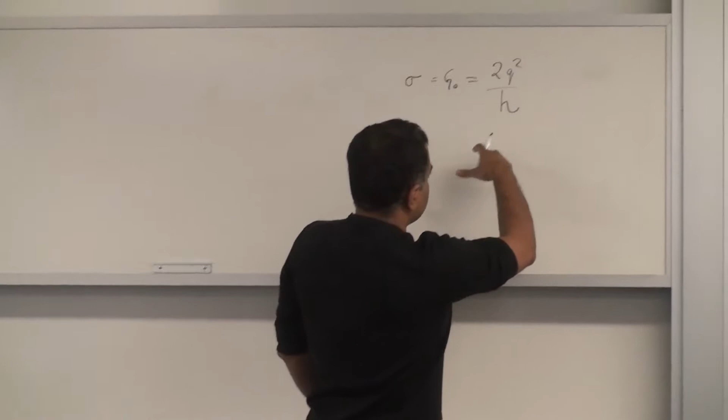That's something we saw falls out very simply from looking at electron transport through a set of wave modes through allowed states, right? So that's something that came out, and when we allow scattering, the conductance is always lower than this. So this is kind of the max we can get through a single one-dimensional mode.

And now we are going to higher dimensions, and at the same time what I'm trying to introduce is the idea that whatever we have done till now is clearly applicable in vacuum, for example, or things like that. But once you put it in a solid, then clearly things are changing, right?

For that, we discussed that when we put particles in a solid, we have this periodic potential—this is kind of every solid state physics course, this is what you cover—that if you have a periodic potential, the electron cannot have... this is the potential energy profile that the electron is seeing. It's a generic potential, this is a cosine potential, but in general you have much more complicated ones where near the nuclei it might go to very large, lower energies.

Regardless, in a free electron state, the band structure allowed electron states follow this parabolic dispersion, momentum squared by twice the free electron mass—that's the kinetic energy in a free electron case. And whenever we have a periodicity of A, a periodic potential with a real space periodicity of A, then we have characteristic k values given by pi over A and minus pi over A. At those k values, the wavelength of the electron matches up with the wavelength of the periodic potential, and you get standing wave formation, right?

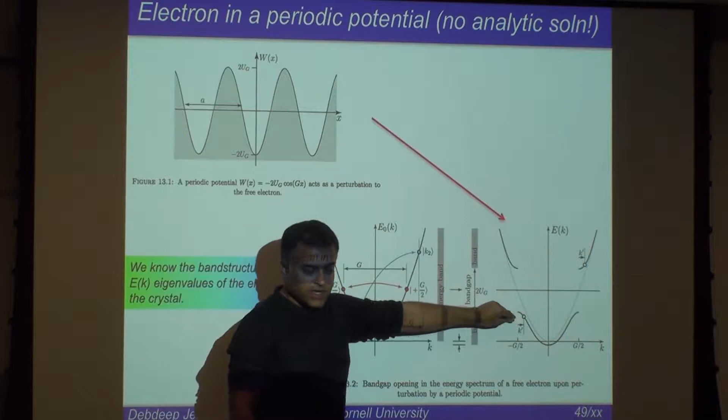So the gap is related to the strength of the potential, and if you have a perfectly periodic cosine function like that, then it is just the amplitude of the crest to trough, UG. It's exactly that, and actually that's 4 times, but it's related—I mean, it's linearly proportional to that.

So this we get from physics, and then now we fill in electrons. These are all the allowed states, and we put electrons into the system. And if I have only one electron, then it can occupy some state here.

But then I fill in every atom that's sitting here. Every atom comes with a certain number of electrons. For typical semiconductors like silicon, each atom comes with many electrons. Many of them form core levels that are deep inside, that don't even form chemical bonds to the next atom.

The ones that form the chemical bonds are the outermost shells of the atoms, right? And those outermost shells, so in silicon, for example, there are 4: 1 s and 3 p orbitals that will chemically bond to the next atom. Those electrons are shared, and for those electrons, we are looking at...

Only when the electrons are shared between atoms can they actually have a momentum. So only those electrons have a band structure. Does that make sense? All the other electrons are localized. They are bound states for the atom. They are not moving, so they don't have momentum. We're not drawing their band structure at all.

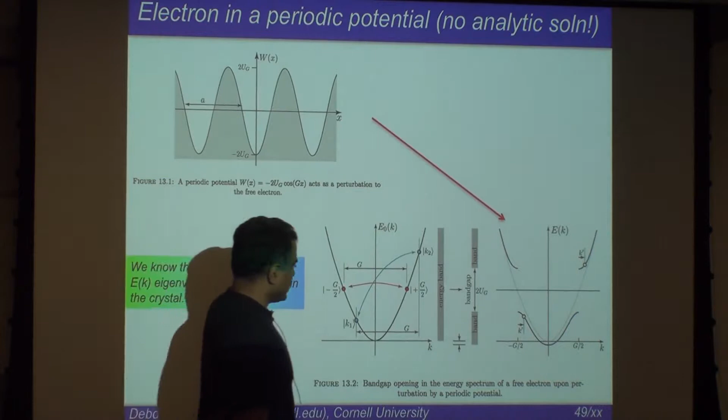Now we are looking at transport, and instead of a free electron band like that, we generally try to plot everything in the first Brillouin zone, because of it being a wave, k plus 2 pi equals k. If you translate something by 2 pi along the x-axis, or you translate something by the reciprocal lattice vector, which is g, along the x-axis, these things are actually the same.

Because the potential is periodic, and you're solving for electron states, basically what you're solving is the Schrodinger equation all over again for the periodic potential, that's V of x, such that V of x plus a is equal to V of x. That's really what you're solving. You're finding what are the allowed energies if I have a periodic potential.

Then essentially what this solution is telling you is the allowed energies are given by that picture, the band structure. Those are the allowed eigenvalues, and it's different for different k's. You have allowed different energies for different k's.

And just like individual atoms, actually there's a very close analogy to individual atoms in the periodic table. If you're looking at electrons in a periodic table, you have hydrogen that has one electron, and that is extremely reactive. It will try to bond to anything that wants to give away or take an electron. It can form hydrogen chloride, hydrogen fluoride, all that stuff. It will chemically bond.

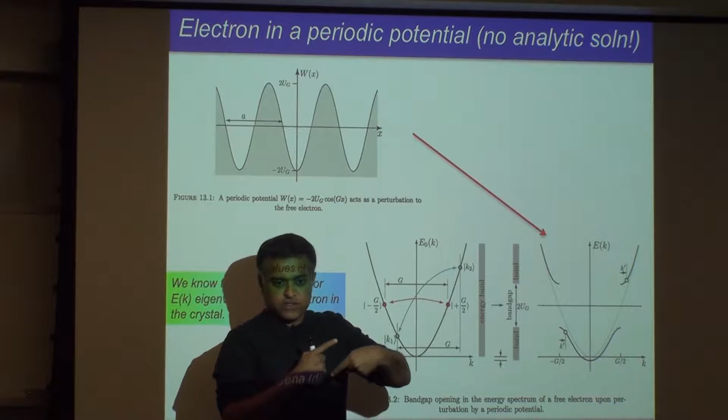When you go to the next atom, helium, now that s orbital is full, it has one up and one down electron, so it's extremely inert. It doesn't want to react with anything. You go to the next, sodium, it has one extra electron, now it again is very reactive. So there's this periodic nature of going between insulating, very reactive, insulating. That's also the name periodic table.

In a very similar way, once you have a crystal, it's the same thing, except we're now talking about conductivity. If I increase the number of electrons, as you can see, I have multiple bands. If I increase the number of electrons and let's say I fill up a band, it's insulating now. You put a little more, now you have a metal. An insulator and metal and all that happens obviously from this picture. If you move from the left side of the periodic table, you have metals. Move towards the middle, you have semiconductors. And then you have gas form.

It's not even a solid. You know, gas is separate.

But then you have this sort of periodicity also in the periodic table because of this, right? Yeah, saying with that point, you were saying like valence. You have a valence band layered by conduction band layered by valence band.

So what I'm saying is when you solve this, let's say for silicon or whatever. What we have now is for atoms we had individual energies, right? And now I form a crystal, right? And we have already seen from a very simple tight binding picture that if the electrons can bond to other electrons, let's say this electron can bond to the next one, then it will form a band. We have seen that, right?

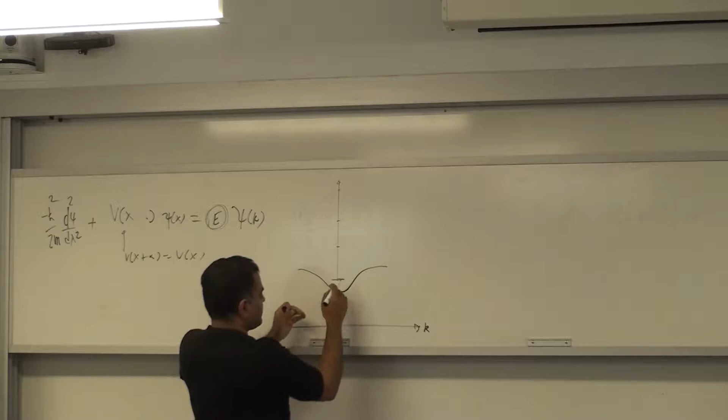And let's say it forms a band something like this, and if it can bond, then it will have some momentum k. If it cannot bond, there's a bound state, there's no k for that. So this energy state, maybe it came from a pz orbital or whatever, it became a band. This one also became a band. That became a band, right?

So now you have multiple bands of states that were initially atomic states, and then they spread out, and because of being in a crystal, it becomes a band. So what I'm trying to say now is based on how many electrons are there per atom that participate in this bonding, you can go from metal to semiconductor to metal to insulator to metal to insulator.

And you go through the periodic table again. Just so you start with sodium, magnesium, and all that, and you reach carbon, and then you come back to the next. So you're filling up electrons as you go, you start with sodium. Maybe you have something like this, the Fermi level is here, right? One electron per atom, right?

You increase, you go to magnesium, it's a little bit higher. You go higher and higher, and then finally you reach, in the first row of the periodic table, carbon, which is diamond, right? And then now you have maybe filled up the whole thing now. So you reach a semiconductor now, and you have a gap. That's all I'm saying.

So this shows up because it's in a crystal, in a condensed matter state or solid state. It shows up as a transport problem now instead of chemical reactivity. Does that make sense? I'm trying to draw an analogy between chemical reactivity and electrical transport. And actually there is a strong analogy because they are both related to electrons, right? And they are both related to how many electrons are available for doing that business, that physical phenomena.

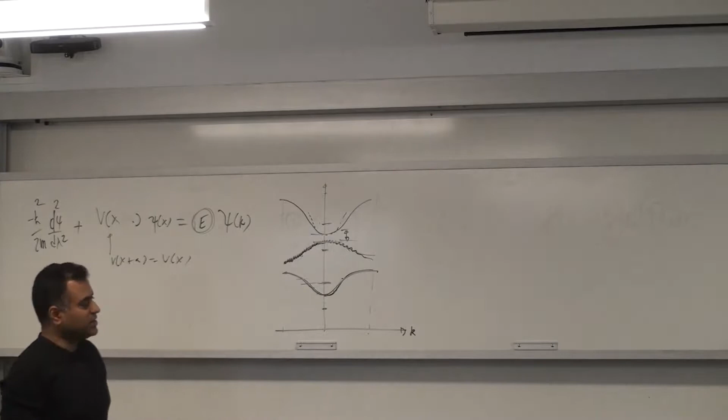All right, so now the basic picture we are saying is we are going to fill it up, and our semiconductor model would be: I filled up this band, and that band is empty, and I have a certain gap, and now all my transport will occur either in the conduction band here or in this valence band here, very close to the band gap of the material. So that's a semiconductor. If we're talking about metals, then the Fermi level is inside here.

Okay, and now if I zoom into this point here, E of k, if I'm going to look primarily at the conduction band, and we're going to focus on that a bit today, we look at the conduction band, and I zoom in here, then I draw the band structure E versus k all over again, and you can see now that the minimum is what I'm labeling as E sub c. This is the conduction band edge, the minimum of the conduction band, minimum energy, and all the other states allowed above it.

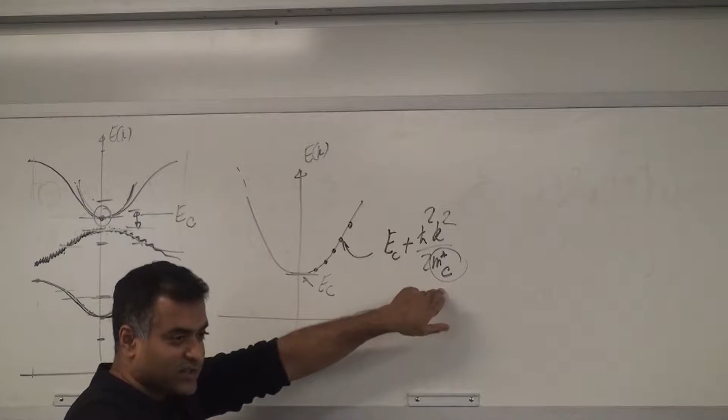Near any minimum is a parabola, and this parabola's formula is E_c plus h-square k-square by twice the effective mass of the conduction band, the curvature. This is just a number, right? And it's clearly not equal to the free electron mass, because it has come from the fact that there is a periodic potential like this, right?

It is related to how strong the potential is, etc. It's really not related to the free electron mass. What you can prove is that for the conduction band, if your band curves upward, the effective mass is going to be smaller than the free electron mass. You can prove that—it's going to be lighter.

It's not that the electron has actually become lighter, but because it's in a solid, if you want a classical analogy, it's kind of periodically accelerating and decelerating, but when you integrate, it's actually moving faster. That's one analogy, and it's actually a pretty apt one.

If I had a ball rolling along this direction and another rolling along this direction, the question is which one reaches here first in classical physics. You can show this one reaches there first because it will accelerate and decelerate due to gravitational forces. So there's some analogy, but I don't want to push it too far. I'm just saying it's lighter because it goes through periodic cycles of acceleration and deceleration—acceleration means velocity went up, deceleration means it came back to its original state. So on average the velocity was larger, if you want to think of it that way.

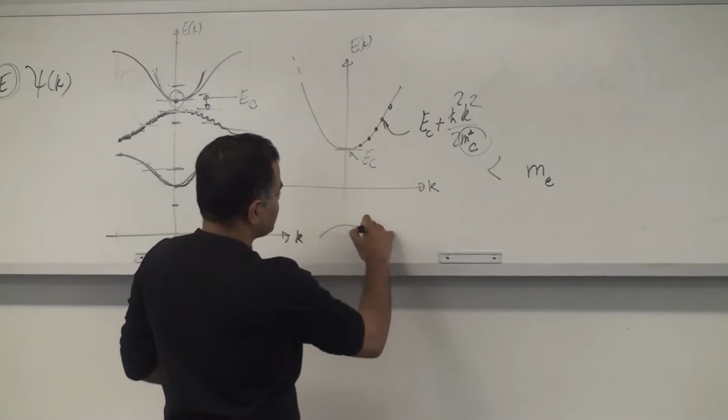By the same token, holes behave differently: for a valence band that curves down, the hole mass can sometimes be larger than the free electron mass, sometimes smaller—it depends. For the conduction band, you can prove it definitively. But regardless, at this point I'm just saying it's different, and this is also written up in the notes I've given you on electrons, band gaps, and effective masses. Please read that up.

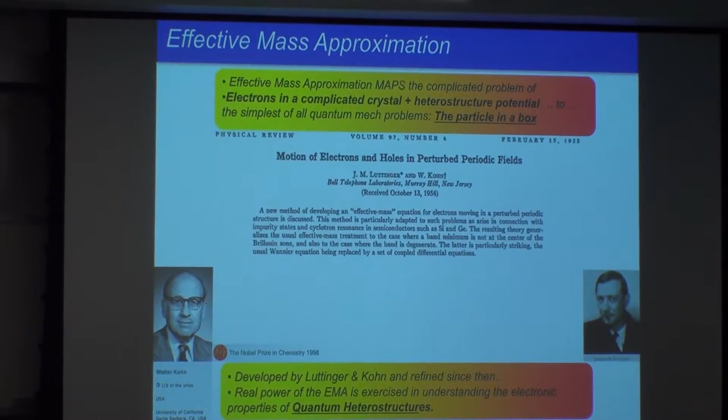I'm going to use this now to look at the idea of quantum transport through solids, giving a more formal introduction. The fact that effective mass appears can also be derived completely from the Schrödinger equation itself. This was done by Luttinger and Walter Kohn, a Nobel Prize winner, who also contributed to the development of DFT.

Here's the basic idea of that paper—it's a bit dense, but here's the core of it. If I put electrons in a periodic potential like we just discussed, then each of these states is an eigenstate, and Felix Bloch had already given us a formula for that state. Mathematically it looks like e to the power ikx times a periodic function in x, u_k(x).

Physically it's easy to see why this should be the case. If my potential is periodic, and if this is periodic, then you can see that if I take mod psi squared, which is the probability of finding the electron at x, that has to be periodic too. Intuitively there's no other option—if the potential is periodic, the electron distribution has to be periodic by symmetry itself.

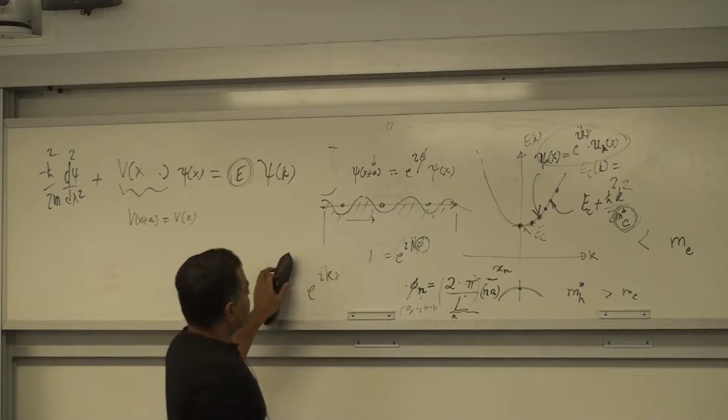So now, given that you have a Bloch function state, this is what I'm also saying, you can prove from here in one or two steps that it should be like this, or if you're given this, you can prove that it must be like this, and vice versa. So it can be related to the physical constraint that the mod psi squared is periodic also.

So now what Kohn and Luttinger did is they said, look, I don't want to solve the Schrodinger equation for basically in semiconductors. By that time, people have realized you can measure mobilities and effective masses and all that.

So they tried to reformulate the theory and make it closer to something which is much more usable from a perspective of heterostructures and doping and all that sort of thing.

And what they said is, instead of looking at individual k states, let's construct states, because an individual k state is spread out over the entire crystal. It cannot be located at a small point, near a dopant or inside a quantum well. It's spread out over the whole crystal. It's because its k, delta k is 0.

K is precise, right? So, but then if I collect a certain window of k's here and construct a superposition state of these such that I weight this heavily and weight that a little bit less, so I construct a state now which is composed of maybe 4 or 5 different k's, and then I write it as some phi of x.

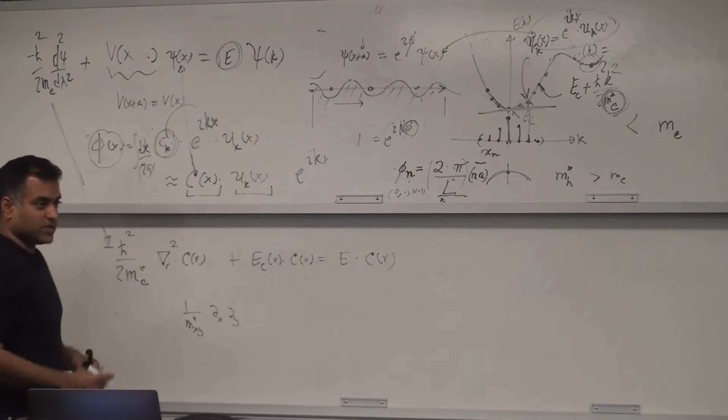It's a tensor. Yeah, exactly. It's a tensor, so it has some strength, and it also has cross terms. In some more unusual materials, you may get 1 over m star xy, with del x and del y, for example. You get all these things too - so in general it's a tensor, yeah, okay.

We're going to keep this simple, but behind this you may have situations where you get non-isotropic cases as well.

So this is your new equation, the effective mass equation that Kohn and Luttinger derived, which they used to explain quite a few things. Let's look at flat band situations where the conduction band minimum isn't changing—it's a bulk material, across the structure. You can take E to the right side and get E minus EC of R, or E minus EC. That's your new Schrodinger equation, the effective mass equation for electrons now, and in structure it looks exactly like.

Your Schrodinger equation you started with, but the only thing missing is the potential, and that's gone into the mass. Does that make sense? It's definitely much simpler, makes life much easier to handle, and that's why it's very popular—we're going to use it now. I think I wrote it here.

Now here's why it's so useful. In addition to being simple, let's say you build a heterostructure like some of the problems you're solving today in your assignment. The heterostructure obviously has a lot of atoms with a periodic lattice—maybe atom A, then atom B, going periodically, and then back to A or something like that. That's a heterostructure where the conduction band minimum

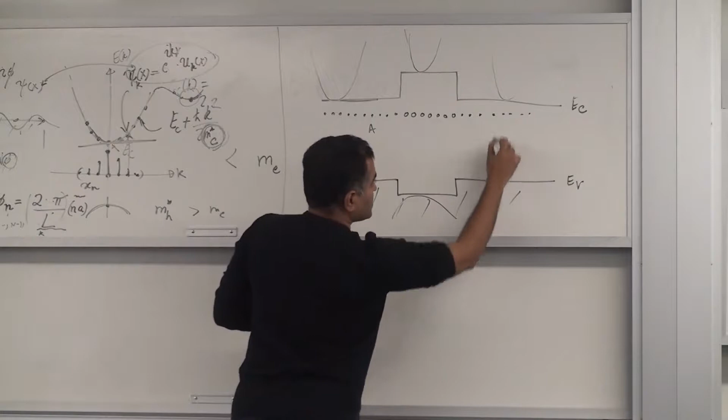So at all points in real space—this is real space, X or Y. Now, if you go to the effective mass equation, the total wave function is clearly changing in every unit cell. It can have—it's changing in every unit cell. Whereas the effective mass equation is looking only at the envelope part of it. The envelope part is changing slowly, changing slowly.

And we know that in this problem—this is actually the problem you're solving too in the assignment—you have an electron incident, coming in, carrying along with its wave function both the envelope part and the Bloch periodic part. Now, the envelope part, if you solve that, it's essentially the problem as if there are no atoms in the crystal. It's going in vacuum, but it has a different mass. That makes it much easier to solve this problem—you don't have to worry about the microscopic details at all.

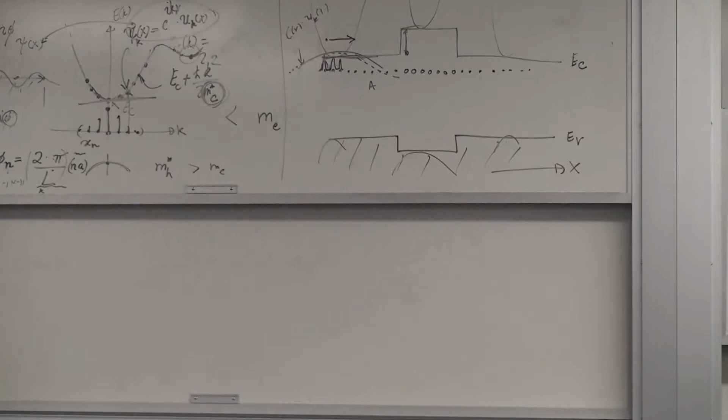And then if you have a potential barrier like this, which is the conduction band minimum changed, that change will appear here now—it's the additional potential term. Does that make sense? Any change in the conduction band—the conduction band minimum went from here to there—will appear as a delta EC here. So this is now your new potential.

You have mapped this rather complicated problem of many atoms, a condensed matter crystal, to one of the simplest problems in free particle quantum mechanics. You have mapped that whole problem to this problem now—it has a different mass. Yeah, that's a good point. So the only difference is this mass and that mass may be different—effective masses may be different.

So there will be a small tweak to some of the things you might want to do. For example, the continuity equation you use when you use the full wave function, d psi by dx, coming from the left must be equal to coming from the right.

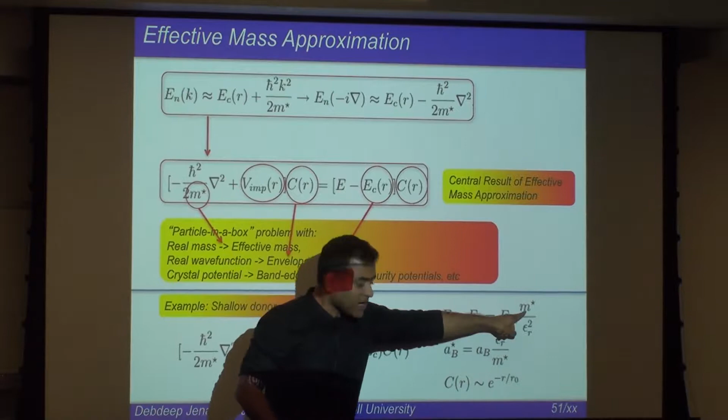And the hydrogen atom is the most solved problem in quantum, where you can find all its energy eigenvalues. So you can find out, if you put a dopant in a semiconductor, what are the allowed energies for that dopant electron, and it will look like a hydrogen atom, except everything will be scaled with the dielectric constant or the effective mass. Because in vacuum, when the electron is going around the hydrogen atom, that mass is the full mass of the electron, and the dielectric constant is 1, epsilon, it's in vacuum. Essentially there's no matter between, there's nothing between the electron and the proton, right? So it sees vacuum.

But inside a semiconductor, when you put a donor, it's going around with many lattice constants, and the dielectric constant of the intervening medium is the dielectric constant of the solid, which is about 10. And the effective mass, as I mentioned, for example let's say indium gallium arsenide, where effective mass can be about 0.1. So it's 10 times lower mass than a free electron, and this is 10 times higher.

And this is the ionization energy of the hydrogen atom electron. That's 13.6 electron volts. If your electron is sitting in the ground state of hydrogen atom, how much energy do you need to kick it out into vacuum? So that's 13.6 eV. So you can take 13.6, this is 0.1 of free electron, this is 10 squared, so that's 1 over... so you get 13.6 millielectron volts now.

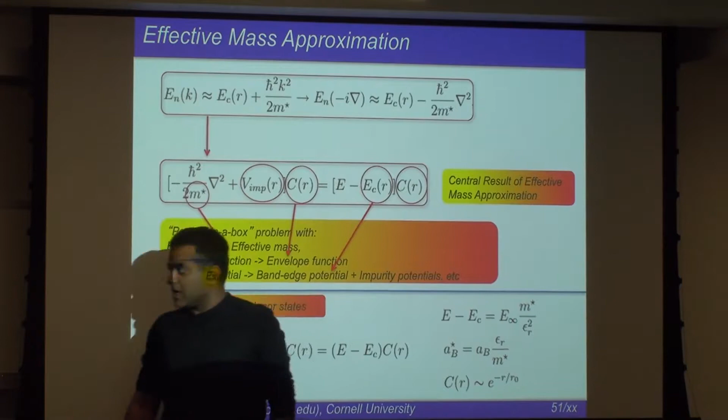Does that make sense? That's the ionization energy of a donor atom in hydrogen in a semiconductor, for example, and that's very close to what you actually get. So this is the reason that Kohn and Luttinger really developed this theory to explain some of the experimental observations that we've put dopants, how much energy it takes for you to ionize those carriers, and in the process they gave us the effective mass theory, which we now use for heterostructures for all these other things. So this is why I just wanted to emphasize that.

Yeah, that's a question. Is that the effective Bohr radius? Yeah, so this is the ionization energy, and this is kind of the Bohr radius, how far from the electron. So the Bohr radius of a hydrogen atom is about 0.5 angstrom, right? That's how far the electron wave function peaks from the center of the nucleus of the proton. But the effective Bohr radius in the semiconductor, if you have an electron going around a positively charged donor, that will be 10 over 0.1, 100 times 0.5. So that will be 100 times larger than the hydrogen atom orbit size.

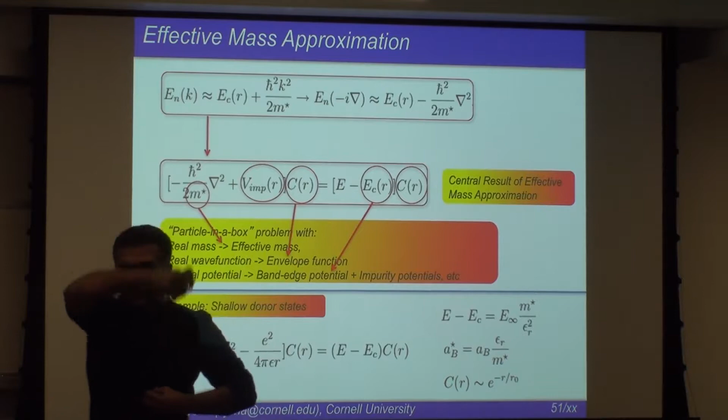So connected to the donor. So basic message is the effective mass theorem maps the problem of electrons in a periodic potential to one of the 6 or 7 exactly solved problems you did in your first assignment, either the free electron or a hydrogen atom or something like that. It will map it to that problem. All changes you need to make are, in fact, realizing that mass has changed, and that's what is responsible for all the details of the crystal.

So what we'll do now is use this concept. Whenever I say I'm drawing an energy band diagram, the reality is that in any crystal, in any semiconductor or metallic solid, the real potential is much more complicated. It's looking something like this for the electron. The effective mass theorem gives you a way to solve this problem without going into all the details of this potential by looking at this effective smooth potential that goes around like that. So that's a nice thing.

So let's use this. One of the things I had just about started: you can see right away that this wave function, or the effective mass wave function, you can write just by drawing on your knowledge from the particle in a box or the free particle picture. And that's what we had just about started at the end of the last class. What we said was the following.

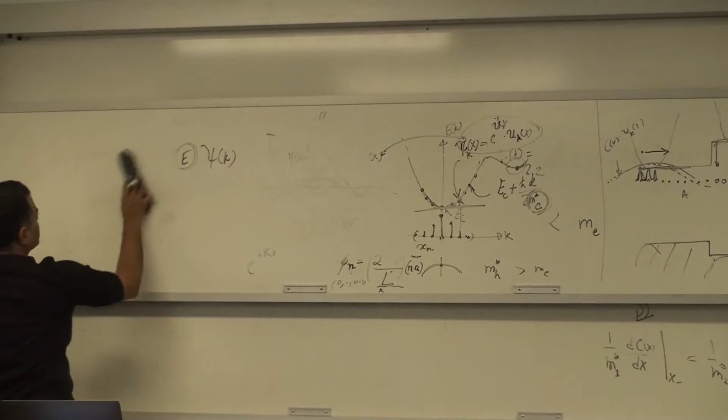I'll erase these. I'm trying to push electrons into a waveguide, a rectangular cross-section area. Let's say that rectangular cross-section is not vacuum, but it's actually a solid made of, say, semiconductor. It has x, y and z directions, with x as the longitudinal direction. This is my crystal, made out of a block of silicon, for example, and this is Ly, this is Lz, and along this direction is Lx.

So now I'm going to have electrons incident, and I want to track its quantum transport properties inside this material. What I'm doing is having Lz and Ly be very narrow, maybe 10 nanometers or something like that, and the electron cannot escape that region, it's going to stay inside. Actually, one of the problems is if it has high energies, it's possible to escape - it must have energy higher than the work function to go into vacuum, but let's assume it doesn't have that much energy. Typically if you make a wire, it will not escape, so it doesn't have that much energy.

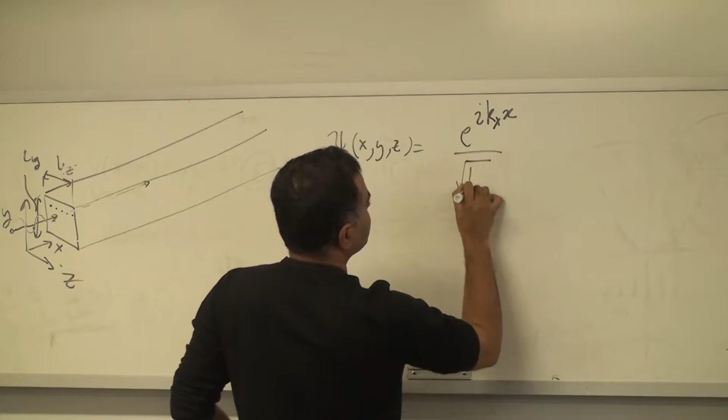In the x direction, it's a free electron, so I write it as e to the power i kx times x over, I can normalize it as square root of Lx, whatever is the length along the x direction. It can be a large number, it can be a periodic crystal, whatever. This is just a normalization factor, because if you take mod squared and integrate over x, this will give you a 1 always, and this will give you the total length. So you get a 1 if you integrate dx mod e to the power... again this is trivial, but if you think of it this way, it will be very clear that it must be square root of Lx, because when you square it you get this, and for normalization when you integrate over the total length you must get a 1. So Lx over Lx will be 1 - it's a square root of length.

And the y and z direction, it turns out because they are quantum-confined particle in a box, there's a square root of 2 here, because it's a sine or cosine function: sine of pi over Ly times integer - I prefer to write the integer first, the quantum number ny, times pi over Ly, times y. So this is your y dependence, and then you get your z dependence, which is very similar, with Lz, times z. So that's your full-blown wave function.

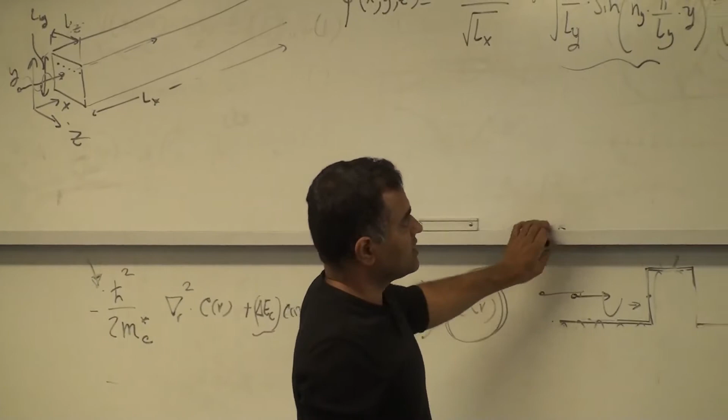Those two parameters completely account for the fact that you are inside a solid. As long as you do that, I don't need to write my psi of x. This part is the envelope function, and I just deal with the envelope function, and I don't bother about that. That's what I'm trying to get to, and I will be dealing with this.

The one situation where it will fail is when electrons go from one band to another. If I'm going in one band, and somehow I end up in the other band, if I have interband transition, then this will fail. You must account for that, because the Bloch function, the periodic functions, are different. So that will fail, but interband tunneling is something we're going to look at in some detail.

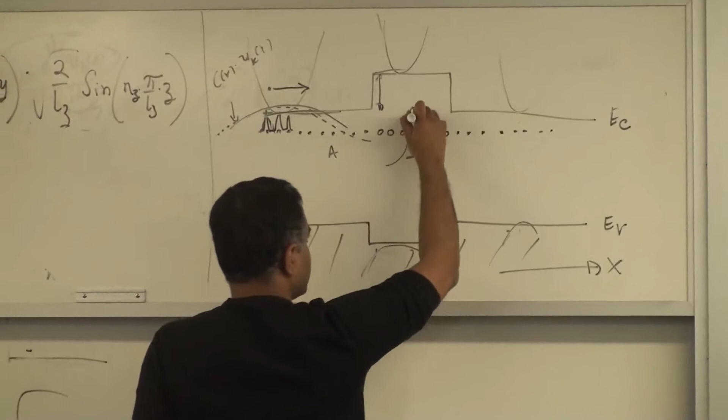Yeah, there's a question: for example, the effective mass approximation, does that break down for deep level states? For deep level states, what happens is you're spatially extremely localized, and you have to go out very far in k-space in your ansatz to build this effective mass, the linear combination. In principle, the effective mass theorem is exact if you include all k-states. In practice, the utility really comes from the fact that you can get away with a very small range of k-states. In principle, if you include the whole Brillouin zone, the effective mass theorem is completely exact. There is no approximation whatsoever.

Does that make sense? In that Fourier sum we did, if you include all k-states, then it's an exact sum, you're just solving it in another space. But in practice, it is very powerful for extended states, where electrons are extended, but limited to maybe 30 nanometer, 50 nanometer, something like that. But for localized states, if you have a deep level, typically it's a very localized state, its extent is 2 or 3 nanometers, or an atomic lattice constant or something. Then, because delta x is so small, delta k is very large, so as a result, you must do a lot more work in the effective mass theorem if you want to use it.

That's why it's typically not used. What you use instead is a slightly different, kind of Green's function approach, which gives a much easier solution for finding deep level states, as opposed to effective mass. But if you include a lot of k-states, there's no problem, you can find your energies that way too for deep levels.

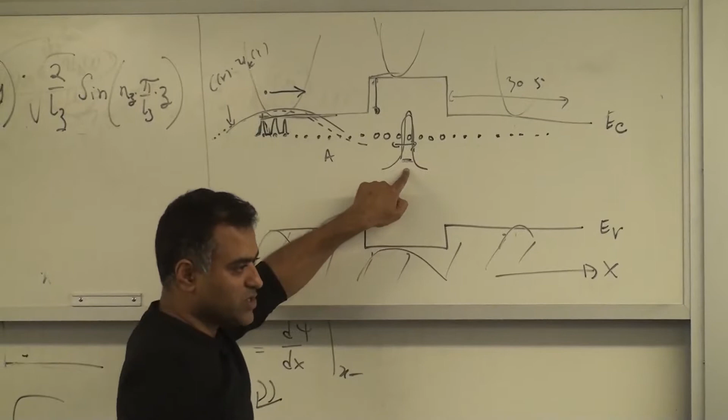So this is what we're going to use, and you can see right now from here that if I want to write down the quantum expression for the current J, before I write that down, let's look at a few other things. I want to find what is the velocity of an electron in that state.

If you look at the k-space, kx, if the physical length is L, Lx, then Kx, and Lx is very large, so Kx is 2 pi over Lx times some integer nx. But if Lx is very large, you can think of it as a quasi-continuous situation, and you have a dispersion along the Kx direction, which is a parabola, and the curvature of this parabola is the effective mass of the conduction band. It's not the free electron mass anymore, and that encodes inside it the fact that it's in a crystal. So these are the allowed states in the kx direction.

And the energy, but the total energy is not just that. Total energy has h squared kx squared over twice the effective mass in the conduction band. That's the first term. There's also energy because of this, and energy because of that. But these are particle-in-a-box situations. Actually, the expression for energy is exactly the same. This is the allowed k for the y-direction motion, but it's a standing wave.

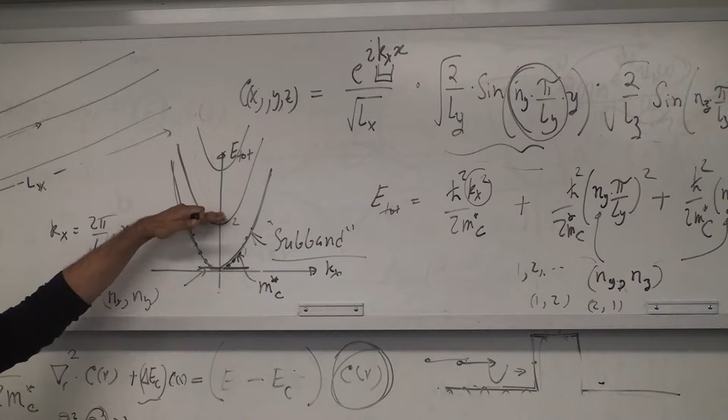So you get all these things, and these will be called the subbands, and I think you can see why - it's indexed by these lateral transverse quantum modes. At a given kx, you can have an electron moving along the first n state, or a second subband, or third subband, or some combination of them, and so on. Right, okay.

Is that clear? So those are the allowed energies for the system. In addition to the allowed energies, let me see what else we want to write. So this is 2D, this is the 1D. Oh, I can already see a typo. Anyway, this should be... anyway, so you can see this is the sketch, okay?

Quantum wire - these are some subbands allowed. Here I've chosen z. So these are this is the envelope function. These are the allowed energies. I've written it in a little more in the tensor form here.

And the last thing is kind of the density of states, which is a very important parameter. So here are the allowed energies, and we generally index this sort of ground state. The combination of these two will be indexed as ny, nz, or sometimes just E sub n. It's a number, so you can index it by this, and so on - the minimum of that subband.

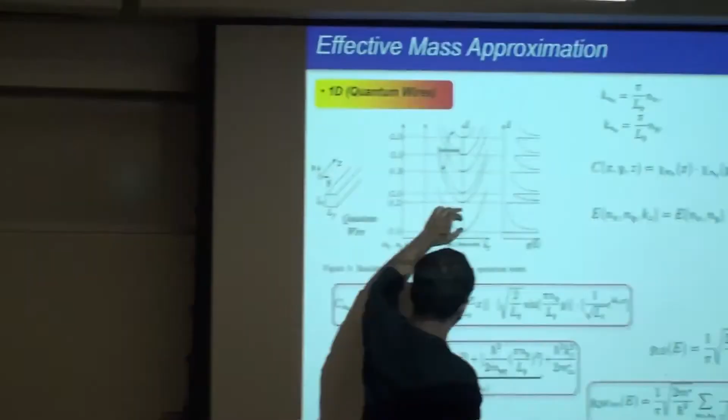And the density of states, I hope you have also seen earlier - essentially it's how many energies are there between a window of energy. How many states are there in the E-k diagram between this energy and a slightly higher energy. If you go to the bottom, you can see that in 1D, at least it's clear that you have a bunching of states, and it actually blows up.

The density of states goes down. Every time you reach a subband, the density of states goes up to very high values, and then it will come down. And you can do the same thing for, by the way, is this clear?

I mean, have you seen this density of states picture? Hopefully - in 1D, for parabolic effective mass, it goes as 1 over square root of energy minus the minimum of that band. So every time you hit a subband, you get a 1 over square root of energy. It blows up initially - this is called the Van Hove singularity - and then you hit the second subband. There's still a tail of the first, and then you hit the second. So you can see that this thing is a little higher than this, and essentially they will all add. The density of states of the first subband is not dead by the time you reach it.

It's kind of still going, and the second one comes down, so it's a little higher, and so on. But you get these peaks in the 1D subband.

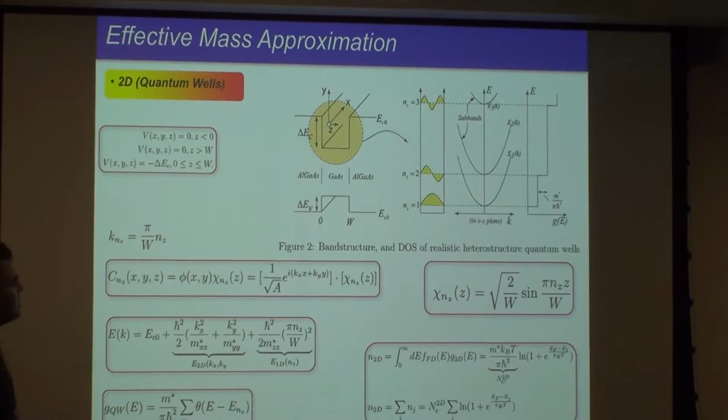If you go to 2D, quantum wells, this is how a semiconductor heterostructure looks now, right? Now instead of electron being quantized, before I go there, let me just also try to illustrate a little bit about...

Let's just wait for a second before you go to 2D. Let's say what I do here is I come in, and in this quantum wire, or nanowire, we put in one slice of a region which has a larger band gap than the rest. This semiconductor layer has larger band gap than this.

So as it's moving along, in the conduction band profile, as you go along, it sees a potential that looks something like this now, right? A potential barrier, right? This is EC. As the electron is moving along in the x direction, it sees a potential barrier like that now, right?

You can solve the problem again. Okay, so I want to kind of sketch out a little bit about how, in general, you solve it, because I'm going to repeat something that you already have done partly and you're doing in this current assignment. This is the simplest potential profile where you have a step, but you can have any kinds of strange ones.

You can put periodic or aperiodic things. You can put wells and all that. You are solving one now, right, with random potential steps and all that.

So here now what you solve is, again, the electron is moving this way, and then you reach this point, and you match, so the k here and the k there will be different, right? Electron k's will be different because your potential energy has changed, the kinetic energy.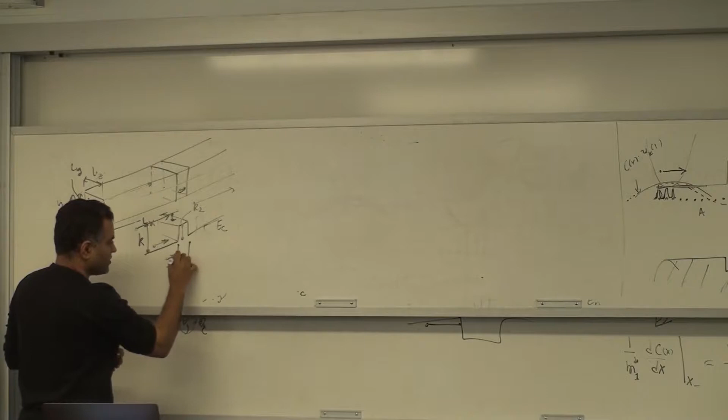And then you again do a wave function matching on these two, this side, from coming from here and coming from there, and from here coming from there. So you will write, one is the incident wave, let's say, and you have r e to the power minus ikx, right, as the reflected wave, right? And then on the right side, you can do your transmitted wave t e to the power ikx.

And inside this barrier, you can do your both transmitted and reflected waves with maybe some a e to the power ikx and b e to the power minus ikx, right? Same deal as any particle in a box or any 1D transport, except now you are taking into account

the electron is in a solid with all these periodic crystals, and it's going from, say, gallium arsenide to aluminum gallium arsenide. But the problem has not changed now. Effective mass theorem makes it possible for you to kind of map the whole thing to the same problem again, right.

And yeah, so are you assuming that there's both reflection and transmission on both ends? Oh, absolutely. Yeah. So I'm saying the electron is incident from the left side, from this side, and I've put a barrier like that, right?

And so now I'm taking everything into account, that there will be potentially some reflection, and there'll be some transmission. So transmission is electron gets out from this side, and every other process is reflection. So inside here, there'll be some reflection and transmission, and we are looking at a steady state situation.

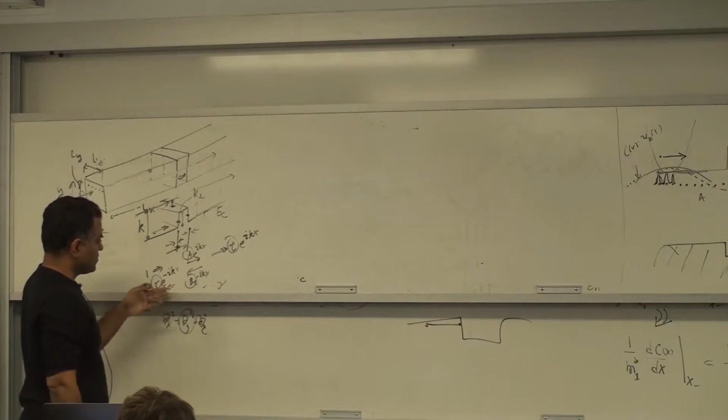Solve it, right? And if you want to find your transmission coefficient here, right, or a total transmission probability, right? For this problem, maybe you can. So if your wave vector here is k2.

And let's say the total energy, kinetic energy of the electron was E, which is how far above is it here, right? And let's say the barrier height here is delta EC, which is the potential conduction band offset, right?

Then you actually can find that the transmission probability. So you get, once you take all this stuff and you find out all these 4 coefficients, and you just find t, take mod t squared, the expression you will get is actually...

You can do this perhaps in Mathematica. It'll give you a couple of, if you set it up right, it'll just give you the answer analytically. You don't have to do the hard work. So if the energy is E, and if the wave vector here is k, here it's k2, so the answer looks something like this, right? K squared minus k2 squared.

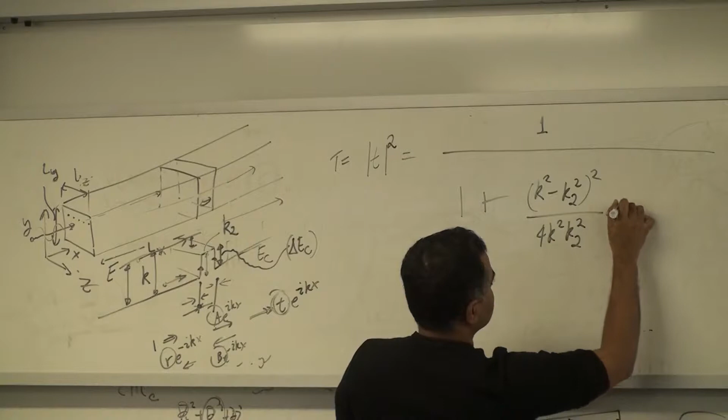I'll write this down because it tells us something about tunneling. Times sine squared, k2 times the thickness d of the potential step. If the potential step is of thickness d, that length will appear here. That's your transmission probability for any potential step in one dimension.

I mean, if it's a uniform height, this is how it will look, where k is this and k here is this, and this is an exact result. There is no approximation here. So what I'm saying is this is true for a free electron going through, and then you put a barrier in it, not necessarily a solid.

But the moment we want to say what is k, what is k2, the fact that this electron is in a crystal will play a role. Why? Because what is k, right? If I know the energy of the electron E, that is h squared k squared over twice the effective mass in a crystal. This is important, so this is the effective mass in the crystal plus EC, really.

But here, let's write it this way, plus EC. But inside a quantum wire, it's not just plus EC. Meaning I shouldn't write it EC, I should write it as E sub n, and I have several of those.

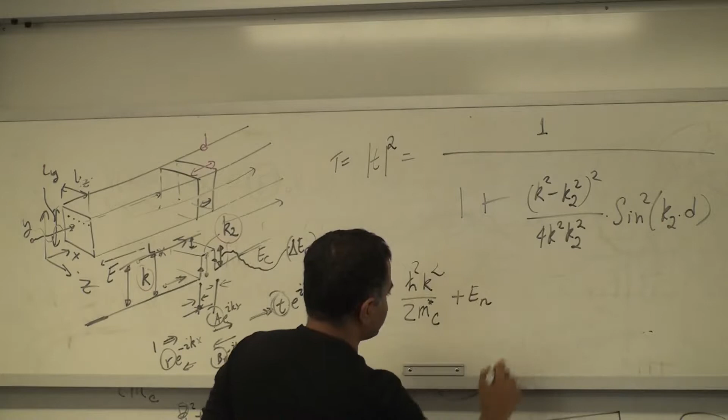Let's just look at one for now. You can see that different subbands will have different probabilities of going through the barrier, or transmission or reflecting. So let's just write it as E sub n for all I care at this point. This is the energy here. So as a result...

Okay, I think I wanted to write it slightly differently. That's fine, we can write it. Is that correct? See, I have drawn this E like this. So this is the kinetic energy. So if that's the total energy, I wanted to write it as EC. Forget this arrow, that's not what I meant to write. What I meant to write is that this energy level at which the electron is going is your E.

Yeah, this minimum can be anything you want, really, so you can set your minimum here. But now here, so that's K. That gives you that K squared should be twice effective mass over h bar squared, times E minus En, right? From here.

Similarly, if I go here, now the energy is h squared k2 squared, where k2 is the wave vector here, over twice effective mass. Let's assume, there's no need to, but for argument's sake, let's assume the effective mass is the same in both regions. It could be different — if it's different, you use the different effective mass here. But let's assume it's the same, m star c.

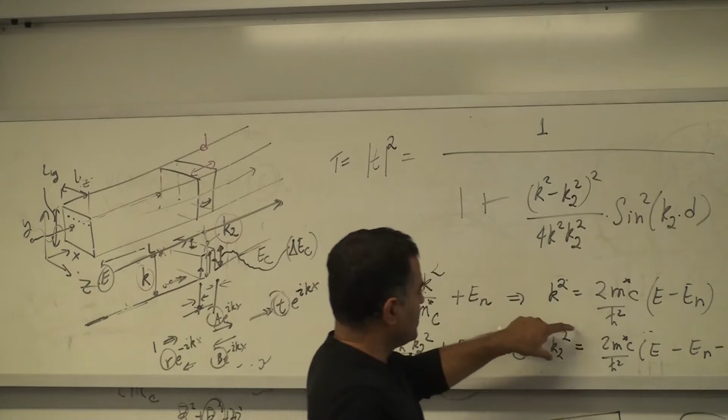And so now K2 squared is equal to, again, 2 times m star c over h bar squared. I'm not doing anything fancy, just writing this down properly. Part of the kinetic energy is taken away by this extra potential energy, so you have less kinetic energy for this one. And you can take these two now and plug it in here. That's all you really need to solve this transmission problem exactly, and you get an answer.

So if you take these and plug them in, what you get is the transmission probability is 1 over 1 plus... so let's look at this: K squared minus K2 squared, that square minus this square, and that is actually pretty easy — that is just 2 m star c over h bar squared.

In fact, maybe you can tell me I don't need to carry this around, because you can see there's a 4th power of k and a 4th power of k — this will just cancel out. It's a constant, so it turns out it won't matter, at least in the parameter here. And k squared minus this is just delta EC, really, the barrier height. So you get a delta EC, and then you square it here.

All right, so basically these energy differences, E minus En minus delta EC, right? So this is your term here. And then your sine square thing will now depend on the effective mass very sensitively. All right, I'm just writing it out, all terms. It's a little messy, but physically I just wanted to see

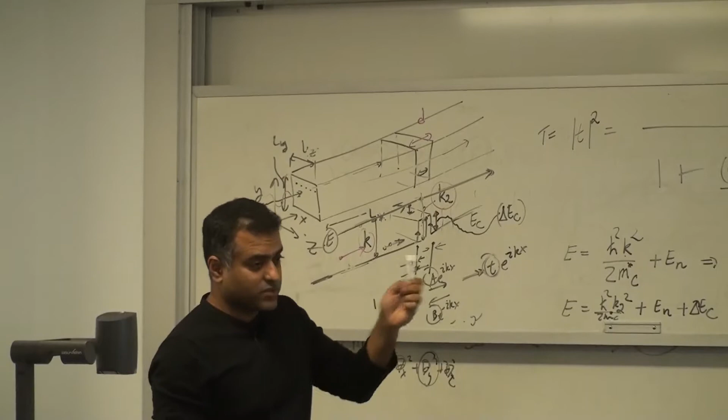Actually, there's a question. Sorry. Yeah, is the value of En the same for both cases? Yeah, so I'm looking at just one.

This is an important question. I'm looking at only one subband, as I described earlier. And you can do this same thing for every subband. You can deal with them separately. So, for example, if I have the 1-1 or the 2-1 or 2-2, right? Whatever I'm doing, you can do this for each subband separately. If you have electrons in the third subband, you have to do it for the third subband separately, right? And you have to take the third subband minimum energy.

So this tunneling probability will be defined for each subband. Transmission probability for each subband separately.

Electron traveling through the quantum wire, where it stays in the same band? Yeah, so because we're looking at ballistic transport, if I put an electron here, it's not going to jump to another subband, it's going to stay there. If we allow scattering and phonons and all that, it can absorb a phonon and go there, for example, but we will talk about those things later. Right now we are keeping all states independent and orthogonal, not allowing some of these defects and all that scattering.

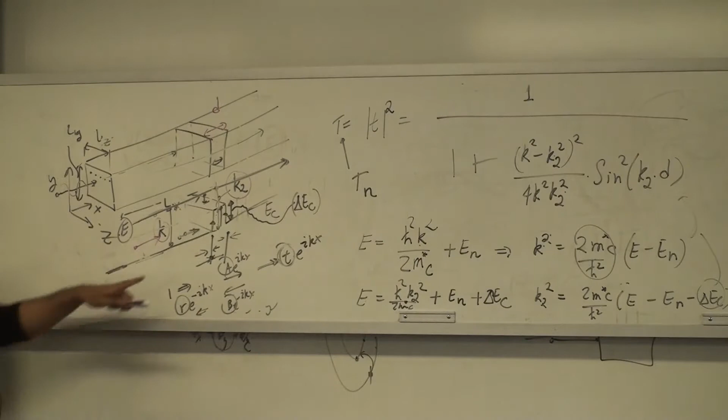Okay, so now if your energy becomes lower than the barrier height, you can see right away that this term K2 squared, there'll be a negative on the right side, right? If this is lower than kind of the combination of these things, then you get a negative. That means K2 becomes imaginary, right?

That's right. And that's not a problem because this will take care of this, because sine of i times whatever, let's say, is i sine hyperbolic. It will become a hyperbolic sine. You can show that in a couple of steps, from Euler's relation. So this essentially just becomes hyperbolic sine. And when you turn it upside down, you get the WKB formula, look something like a WKB formula. You get the tunneling probability.

So essentially, I'm saying that this, okay, so if energy is below, Mathematica, for example, will not complain. It knows how to take sine or cosine of an imaginary number. It will just become that. But if there are some functions, tools you use, that will complain, oh, you're feeding an imaginary number into sine, then you can convert it into a form that will basically be very similar to this K2 squared over, except there'll be an i squared in the front, so the sign will flip. You get E minus En.

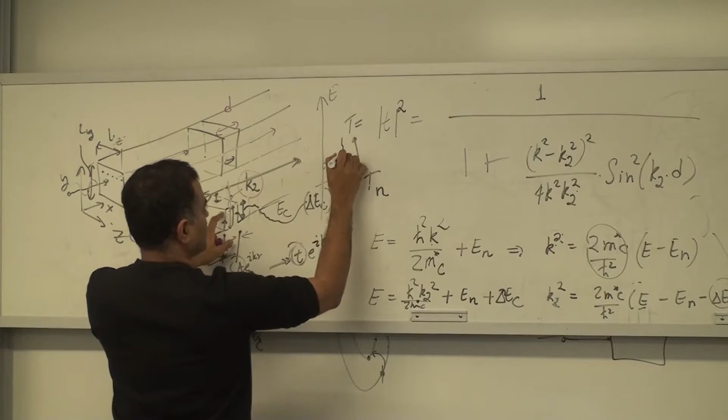So the same formula takes care of whether you are tunneling or whether you're not tunneling. It's the same thing, so you can take care of all that, and make a plot of this electron distribution as it comes out. I think you can know that if your electron energy is larger than the barrier height, your transmission probability will be very close to 1, but then lower it will exponentially decay. The tunneling probability kind of goes down, and this formula will give you both.

What I wanted to use this for is to also highlight that all these processes you are solving in one dimension, at least in the current assignment, but it's the same in multiple dimensions. All that you need to do is take care of the effective mass and the fact that you have subbands, or some transverse direction quantum confinement. Other than that, all these are mapped to the 1D problem in the end.

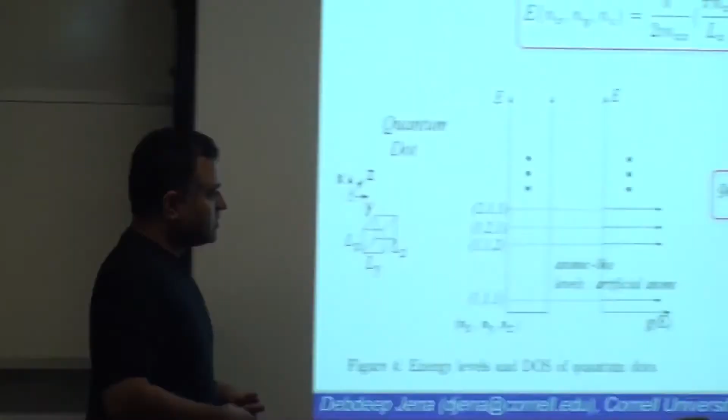So what we'll do then is use this, so that's bulk materials in 1D. You can go to quantum dots, same business. In quantum dots now, you are confined in all 3 directions. The electron cannot move in X, Y, or Z. You're confined in all 3 directions, and now you're a particle in a box in all 3 directions, right? And then your energies basically have 3 quantum numbers now, because all 3 directions are quantized, and now it looks like an atom. Basically your allowed energies are discrete, right?

Remember, if you allow the electron to move in any direction, the density of states will spread out because there's a band, right? There's a dispersion. If you don't have a band, the energies will be discrete. So later on, we'll see.

Later on, maybe 2 or 3 weeks hence, you can start with a 2D system, a 2-dimensional electron gas system, where the electron is free to move in 2 directions, and you apply a very large magnetic field to it, perpendicular to the 2D electron gas. The electrons are free to move in this way as you apply the magnetic field perpendicular. Classically, that magnetic field wants the electrons, or charged particles, to do circles. So what it does physically is it reduces the degrees of freedom by 2, perpendicular to itself. If the electron was free to move in 2 directions, it will freeze its directions by 2, at a very large field.

So what will happen is in a 2D electron gas, in a 2D system, I forgot to say, but the density of states in a 2D system is a constant for a parabolic band. For 1D states, it was kind of peaking and dropping, right? In a 2D system, the density of states, as you go within one subband, is a constant. This is a very important result, and that value is effective mass over pi h bar squared. That's the density of states of any 2D electron system which has a parabolic band structure. Parabolic band structure is an important thing here. It's a constant, right? So forget about all the subbands, just one subband, you think of it as a parabola.

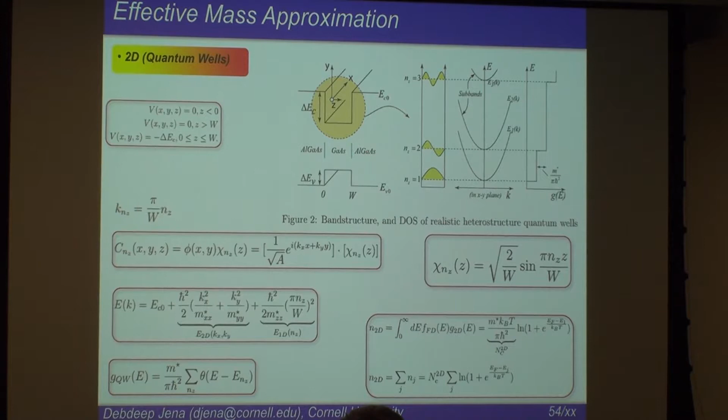But then you come in now and apply a very large magnetic field perpendicular to the 2D electron gas, and it will change. Intuitively, you can think it's going to reduce the dimensionality by 2. It will go from a 2D system to a 0D system, like thing. So the density of states will become a string of delta functions, if you might, or atomic states, discrete states, and these are called Landau levels. We are going to look at this because that's the heart of all this quantum Hall effect and all that stuff.

We'll see that this problem, when you apply a large magnetic field to a 2D system, maps the 2D electron gas system into a harmonic oscillator problem, exactly the same as the harmonic oscillator problem you solved or looked at in the first assignment. The energies will come out equally spaced. So that's where it will end up being.

Okay, yeah, question, just a backtrack question: how would you measure effective mass experimentally?

We will discuss various ways. These days you can directly measure the band structure using angle-resolved photoelectron spectroscopy or similar techniques. If you know the band structure, you can plot it, fit a parabola, and get the mass directly. That's one way which is now popular. It's done here at Duffield, in Professor Kyle Shen's group, they do that regularly.

The other way is through transport, and this is nice because when you apply a magnetic field, Landau levels form, and this separation is related to electron charge times magnetic field divided by the effective mass of the material. So by measuring the separation through transport, with Shubnikov-de Haas or integer quantum Hall, you can get the effective mass too. So there are transport ways of doing it.

There are also cyclotron resonance measurements which can give you effective mass. If you read Kittel's book, that is described. There are quite a few ways.

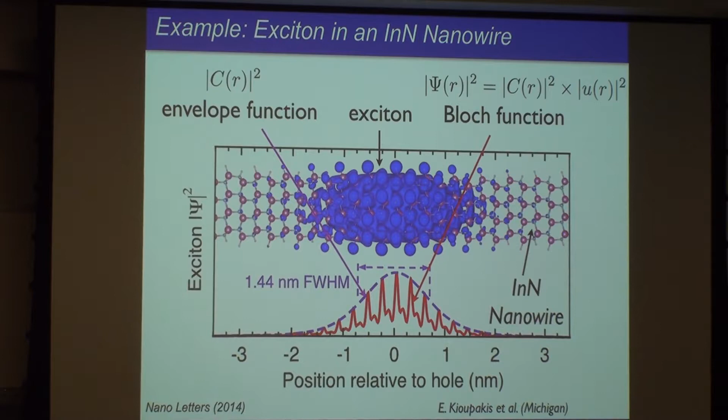So, I will use the last little time I have to talk about the ballistic transistor now, and I wanted to make sure you have this under your belts, because it will remain important throughout the course - to be able to, when you look at a problem in 1D, 2D, 3D, write down the envelope function just by looking at the problem.

Here's the envelope function that works. And whenever I have a transmission problem, you should be able to treat that problem from this effective mass picture too, using delta Ec's, effective masses, and all that.

One more thing I want to add before going to the ballistic transistor: whenever you're solving a transmission problem, I strongly suggest also looking at what you can intuitively expect from a classical physics situation, because that will always help guide your answer. Quantum is obviously different, but it's not very different.

For example, as we were discussing in office hours today, if I have a situation with some complicated potential - let's say something like this, I'm just arbitrarily drawing this - here's your potential profile for electrons, and you're saying, plot the transmission probability, the full quantum transmission probability of electrons going across this profile. So what should it be?

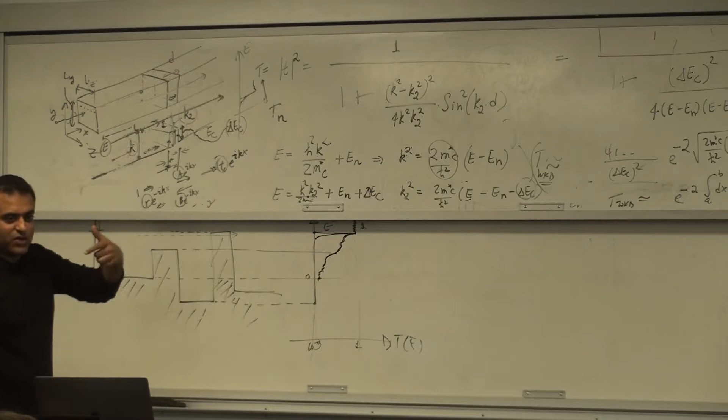In fact, in Kroemer's handout, look at the single barrier. You will see there are, whenever the wavelength matches integer, this is a quarter wave sort of picture, there's always a 1 there in the resonance. So use this when you solve the problem, see whether it makes sense, whether it has that sort of a feature or not.

One important thing: if I'm tunneling through two barriers, I want to point out one more thing here. If you meet a very special criteria, which is the barrier heights of the two are the same, then you will see there is a very unique situation when the probability will go to 1 again. There's a resonance here, so this is a cavity, effectively the same feature. This is a resonant tunneling diode, and it's a very weird situation when the resistance due to two barriers is actually smaller for that energy state than the resistance due to one barrier. This is allowed, and it's actually used for making resonant tunneling diodes in semiconductor devices.

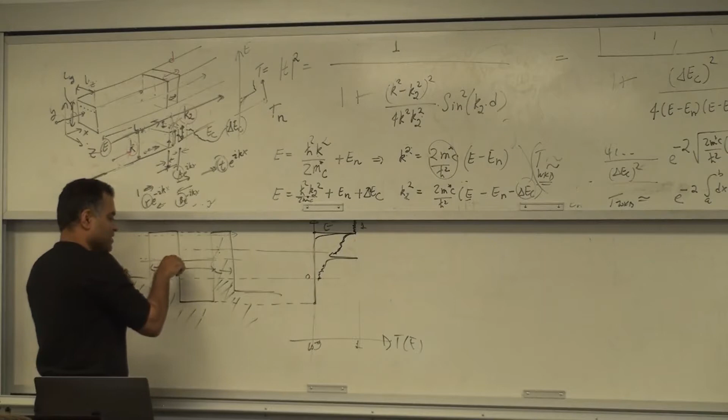Does the width have to be like 2 pi over the k value? Exactly, so this width doesn't matter so much as this width. This is very important, where it's a free electron, meaning where it's not an evanescent state, there it's important. So it's basically the exact analog of a Fabry-Perot cavity that you use in lasers, where you have light going back and forth. It's the exact same thing, really.

Okay, so now let's look at the next topic, which is to take this sort of effective mass picture and apply it to the ballistic transistor. Let's erase this spot here.

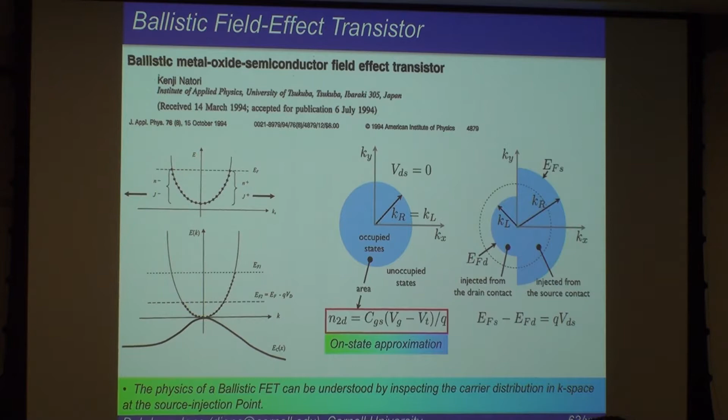And the transistor we are going to look at will be a two-dimensional system. This problem was solved, the full essentially quantum transport problem of the transistor, field effect transistor specifically, was solved by Natori in 1994, that's the paper. If you get a chance, I encourage you to read it, because conceptually it's actually very... now that we understand some of these aspects of k-states and the waveguide sort of picture, it should make complete sense. So what we'll start with by looking at a transistor: here's how we're going to set the problem up. Instead of looking at a full silicon and all that, we're going to think of a semiconductor which is two-dimensional, it's a sheet.

Has some width and some length, L and some W. And the way we are going to set this problem up is say that I have made these two regions. I have populated this semiconductor.

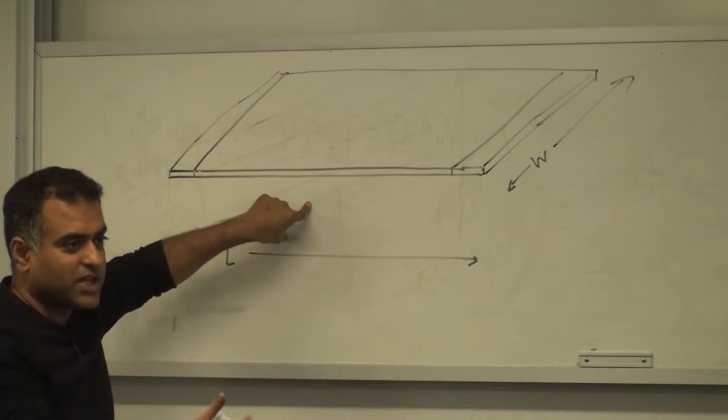By the way, this was fictitious earlier on, but since discovery of graphene and now all these layered materials, this is very real. You can have a monolayer semiconductor, tri-layer semiconductor, molybdenum sulfide or boron nitride—this is very real. You can actually have a 2D sheet of semiconductor, and that means it has a certain band structure. It has the E-K diagram for electrons inside, and it has a gap and some effective mass, and we're going to characterize it by those quantities.

These two regions, I'm going to dope very heavily somehow, and populate them with a lot of electrons. These are heavily doped regions. And then I make a contact to it by depositing a metal on it, for example. So this is going to be my source contact, and that's going to be my drain contact, just like we have talked about earlier.

In this device, what we are always going to do is ground the source always. And the drain, initially in the discussion, we are also going to ground that for now—also grounded. So that's just a 2D conductor or 2D semiconductor now. So I mean, it's a source and a drain.

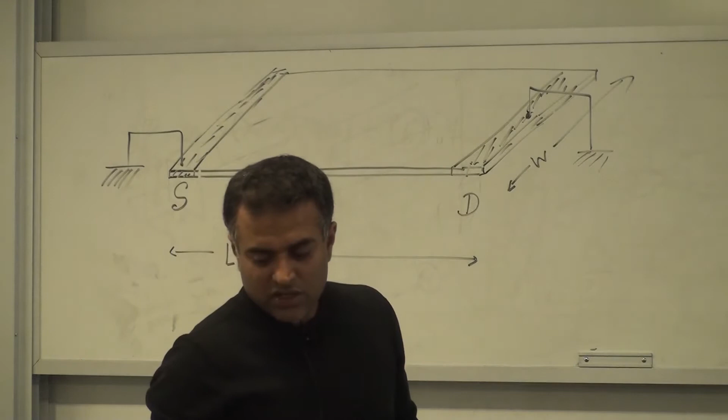And if I were to draw the energy band diagram of this, or how does the E-K diagram look? This is just an illustration, so I'm just going to talk about that. We are not looking at all these gates yet. We're just looking at the 2D conductor cross section, and here's the energy band diagram.

It has a gap, and inside it there's an effective mass of the conduction band. And I have doped these two regions heavily, so I populated the conduction band with quite a bit of electrons, both on the source and the drain. I think you know very well electrons don't have red or green colors, but there's a reason it's shown like that, because once I apply a voltage, those two distributions will do very different things. So that's why we've just labeled it like that.

And here's the starting point of the picture. So this is the energy band diagram in real space. And we are going to focus at one particular point of the device, which is where the source is going to try to inject these electrons into the channel. This is called the source injection point for obvious reasons. And that's a point where the energy band diagram goes from some slope to no slope, zero flat.

And that point is—if I apply a voltage on the drain and move this, that point will move a little bit, but you will always have a point where the slope is zero, because the band is curving that way. So that's the source injection point.

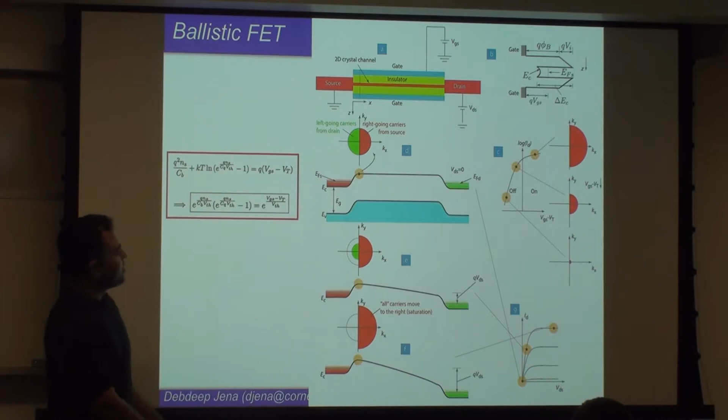And if we focus at that point, we can really solve the ballistic transistor problem in a very nice way. So let's first look at the following problem, which to me is actually much more important than the ballistic transport part of it. Qualitatively, let me finish the discussion of how the transistor works from all the ballistic and the quantum picture we have talked about.

So this is a 2D electron system—a 2D crystal channel. There are electrons that are free to move in two directions, in the x direction and in the y direction. So you should be able to write down the wave function of that very easily: a free electron in the xy direction, but a bound state in the z direction, for example, is very easy.

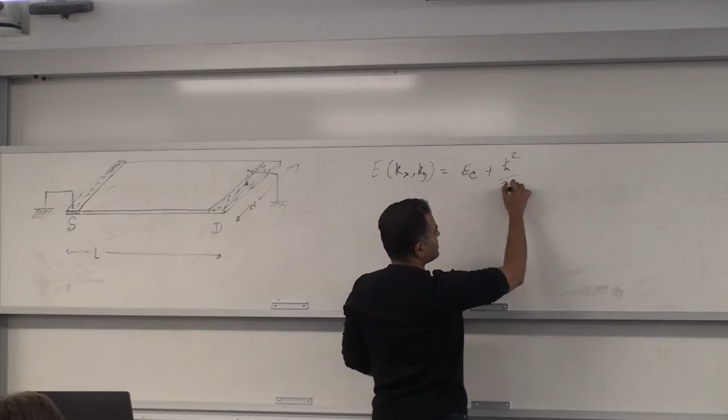And then you can find out what are the energies allowed for that electron. And the energies allowed for that electron will depend on kx and ky—let's assume it's isotropic effective mass. So it will be a minimum of the conduction band plus h-square by twice mass, times both kx squared and ky squared—kx squared plus ky squared. So those are the allowed energies for the electron in the conduction band.

Now, if I look at that point, it's a point in this picture, but really here it's a line, going across the width direction. It's a source injection point where the band diagram is flat. Initially I said I have grounded both the source and the drain, so both are sitting at ground. The source you can think of as a metal—it's a heavily doped semiconductor with a certain Fermi level, the Fermi level of the source. That depends on how much you dope it, but it has a certain Fermi level, and if both are grounded, these two are exactly at the same energies.

Now, at this potential, there's a potential barrier for the electron to go from here to there. But if I look at that point in k-space, here are all the allowed k points, and all the right-going carriers have come from the source, since it's a ballistic transistor. If they've come from the source, I've populated a k-state here.

So let me draw that one more time: kx and ky. These are all the allowed k states, and these k states are separated in the x direction and in the y direction by a certain amount. How much is the separation in the x direction? 2 pi over L. What about in the y direction? That's just the width, so 2 pi over the width.

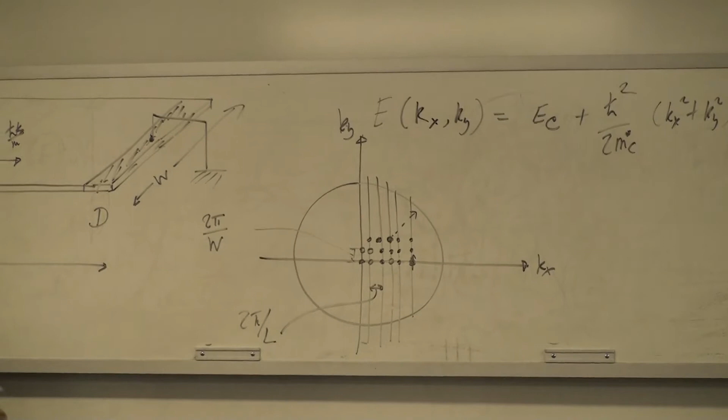And you can see right away that if my source has injected carriers, it will inject carriers with a distribution that looks something like this—injected carriers moving in all these angles. That's what's shown here.

And for each of these k points, you know all its properties: you know its energy, and you know its velocity. What is the velocity? It's the group velocity, which is 1 over h-bar times the gradient of the energy. That's a fancy way of saying it's h-bar kx over mass in the x direction, plus h-bar ky over mass in the y direction—that's the velocity vector. You just apply the gradient on these two, and it's very straightforward.

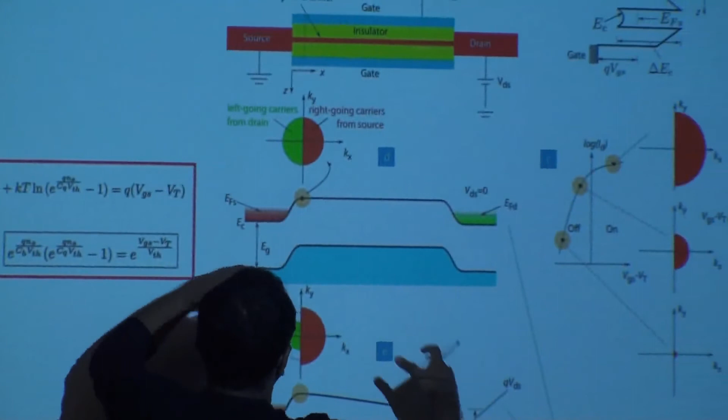Now you can also see that if you have a barrier height like that, very few states would be occupied, because there's a large barrier height, so the probability of occupation for injected electrons is very low. The way it's drawn here is as if a lot of states are occupied, and that is done in a transistor by the third terminal—not by the source and drain, but by the gate, which is capacitively coupled through an insulator to this layer.

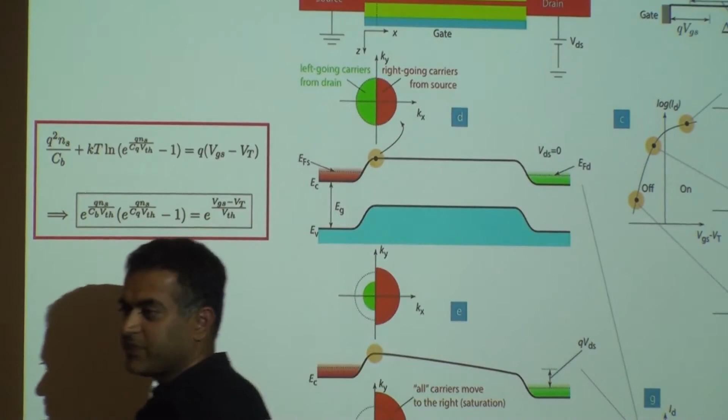So, as a qualitative summary, what the gate will do is control how many of those waveguide states, or quantum states, are occupied. It will control the radius of this circle when the drain and source voltages are the same—or rather, more precisely, it controls the area, because the area is directly related to the density of particles.

And just to put it qualitatively, you can write down that the density of electrons is the gate capacitance times the voltage you apply. Here we'll see there will be a certain threshold voltage necessary to start filling states, and this thing will become a series connection of two capacitors.

One will be a barrier capacitance, the other will be called a quantum capacitance. We'll see this, maybe today. This is what it's going to become, but this is also an approximation. This will only be achieved in the on state. In the off state, we'll see it exponentially decay. The full relation between carrier density and gate voltage is given here. It's a transcendental equation, not something you solve directly, carrier density versus gate voltage.

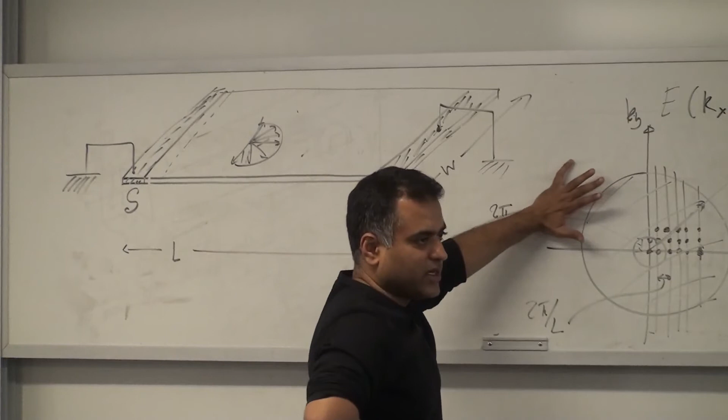So there was a question. The gates control how fast electrons are moving, because that's related to the momentum. The gate electrode controls how many K states are occupied, that's it. If the gate voltage is high, much larger than threshold, the circle will become bigger. That just means I have more states now moving faster, but they're moving in all directions, so the total current is still zero if my circle is symmetric. But it will fill it with more particles, more K states.

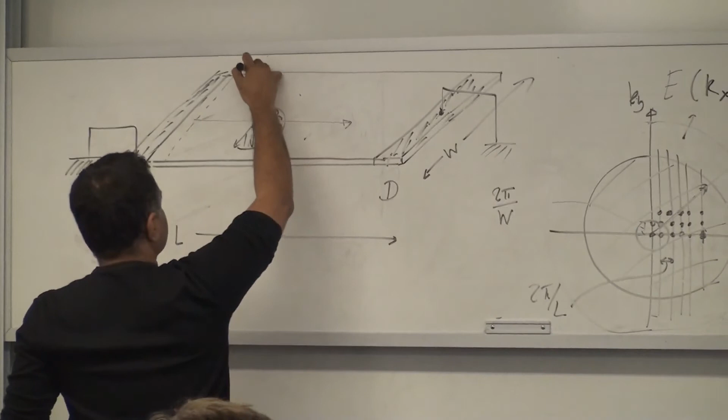And the gates would have to be perpendicular to the longitudinal direction. Electrons are moving in the x or xy plane, but the gate is put down in the z direction, meaning the electric field that the gate applies, when you apply a voltage, will be in the z direction, the perpendicular direction, to help fill or empty these states. The field effect is in the z direction. But there's two, because you're controlling momentum in two directions, kx and ky. That's a good question.

So nothing changes in the y direction, everything is symmetric there. If your gate is parallel to the 2D sheet, it cannot change anything in the y direction. But sometimes you can also put a gate which is like a fin, or it turns around, then you can also affect the y direction of the device. Whatever we are saying now, everything is symmetric in the y direction, nothing is changing there, so as a result all the currents will cancel out in the y direction. The net stuff will only flow in the x.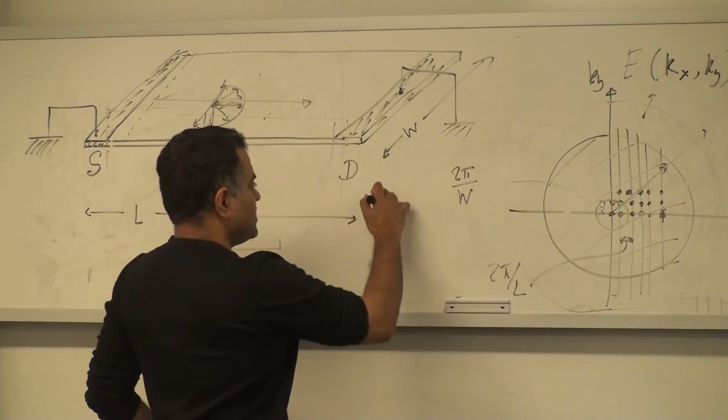So the gate is going to, you had a question? Does the gate to source potential change the band curvature, the curvature of the band? That's a very good question. The answer is no. The band structure, the E-K diagram of the semiconductor, is not going to change with the gate voltage. What it will do is move the whole thing rigidly up or down, but it won't change the curvatures inside.

What about the drain? Neither one can change it. These are non-perturbative approaches. So now I want to physically show why.

If I turn on and apply a positive gate voltage here, electrostatically you can see it's a parallel plate, done in a symmetric geometry. A positive voltage on the gate metal means you are taking electrons away from the gate metal and injecting them into the semiconductor. If both source and drain are grounded, you are injecting it from both sides, from the source and the drain equally.

So those electrons really came from the gate and got injected here. The ones that got in from here are going to the right, the ones that got in from here are going to the left. By changing the gate voltage—there's no net current flowing here, but this is the electrostatic control of the device, which is actually more crucial than the transport part of it.

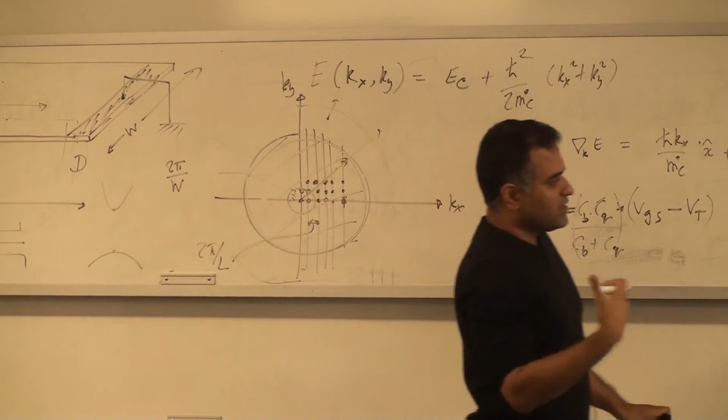When you calculate how the total carrier density here depends on the gate voltage, that relation is what I mentioned—this is the relation here. So you kind of change this carrier density occupation here.

Do I need to sign anything? No, okay. Yeah, thank you. Yeah.

Physically, if you want to draw the band diagram when you apply a larger gate voltage, what happens is this band will be rigidly pushed down and the barrier height will go down. And that's why it injects more.

So at this point, the net current flowing in the drain is 0. Now you apply a drain voltage—you hold your gate voltage at this level and apply a drain voltage. When you apply the drain voltage, you can see right away, it's exactly the same as we did for the 1D conductor: you pull this down by Q times V.

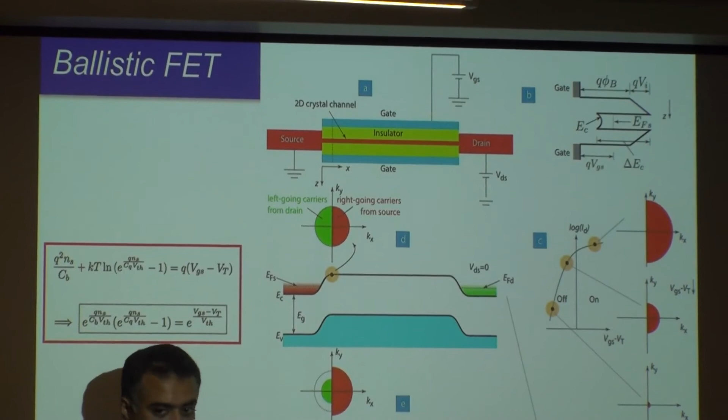Now this distribution function must change. How will it change? You can right away see that it's harder for the drain to inject carriers to the left now, because the barrier height is larger. On the other hand, it seems like the source—nothing has changed. It should be able to inject about the same amount of carriers as before, because I only applied the drain bias. But...

One of the reasons for the existence or usefulness of the transistor is the following: actually, the source—the amount of carriers it's able to inject will also change. It has to change.

The gain of a transistor, the fact that it's really a 3-terminal device with all these properties of gain, output conductance, and saturation of current, comes from the fact that the gate completely controls the area of this curve. That job is not the drain's—the drain does not control the total area of this, how many particles there are, how many electrons, how many states are occupied. That job is completely the gate's. If the gate loses control, that transistor is not very useful.

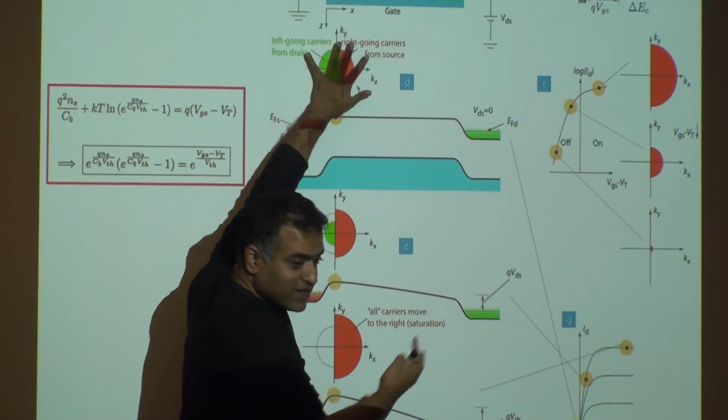It's as if you have 3 resistors in series—it's not, it doesn't have gain. But as long as the gate completely controls it, the gate controls the n, or the electron density, of your transport, and the drain controls the v, or the net velocity, if you might.

That's the difference here. For the area to remain the same, it's very clear that the red right-going circle must increase, because the gate voltage is constant and I'm increasing the drain voltage. You can see right away this will have a net current for sure. So if you plot the drain current versus the drain voltage, the current will start increasing like a resistor—and this is completely ballistic, fully quantum.

You can calculate it now. All you need to do is find the velocity of each state, take a projection. If you project along y, the current will always be 0 in the y direction because it's symmetric in y. But if you project along the x direction, you can see there's a net current to the right, and if you take a reflection of the green circle, that will still give you 0, but you have this ring around it that will give you a non-zero net current. You just sum them.

So that current will increase, and then you crank up your drain even more. At some point, all the carriers are going to the right—they've reached this situation now. If you apply even more drain voltage, it couldn't inject any more, it's still not able to inject any. So all carriers are moving to the right, and the area of this is exactly equal to the area of that because the gate is under control. So for a given gate voltage, the current will increase and then just saturate, because this current is locked now.

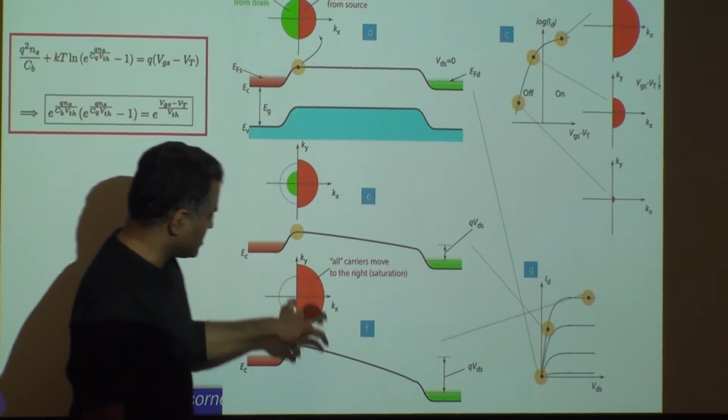It's not changing anymore, right?

So this is a very characteristic behavior of any transistor really, but in a ballistic transistor it becomes easy to see why it will behave in this fashion. All these carriers came from the source. Now that's not enough for a transistor, but the transistor is really useful because now you can tune the gate voltage and say I want less current.

Let's look at the gate situation. Let's say I'm sitting here at this current, and this current is saturated. I turn down my gate voltage now, so the gate voltage is going to shrink this thing, and finally it will turn it off completely. And this happens exponentially. In the on state it goes linear and then it goes exponential, turns off. So that's on-off.

So basically ID versus drain voltage, that's your characteristics. If you look at the drain current on a log scale as a function of gate voltage, it initially looks like a polynomial, and then it goes down exponentially when the Fermi level essentially goes below the conduction band edge here, it goes down exponentially.

So this is your on-off switching of a ballistic transistor, and the rest of it is all application of this, if you want. In the assignment, I've actually asked you to calculate this for a realistic two-dimensional material, and you can do this for any semiconductor you want—silicon, molybdenum disulfide, any of these 2D materials. You can do it for graphene if you want.

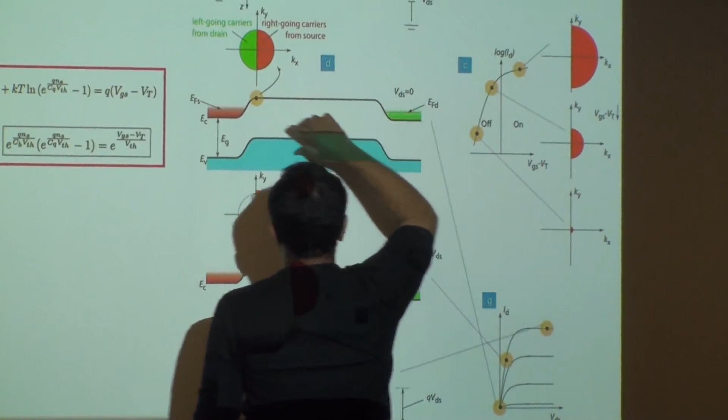In graphene, it'll come down and go back up again because the gap is zero. So it cannot stay off, there's no gap, so it goes back up again.

For this structure, you always have to make sure that your gate is isolated—there's no actual overlap with the source and the drain.

So the electrostatics of it is such that you have to be extremely careful. The hardest part of the transistor is to make sure the gate controls the electrostatics completely. If you have a long device, it's very easy to do that, when the source-drain is long and the gate is very close. But when the distance of the gate to the channel becomes similar to the length of the channel itself, which happens in nanoscale devices when you have 10 nanometer source-to-drain distance, you can't put the gate much closer than a few nanometers.

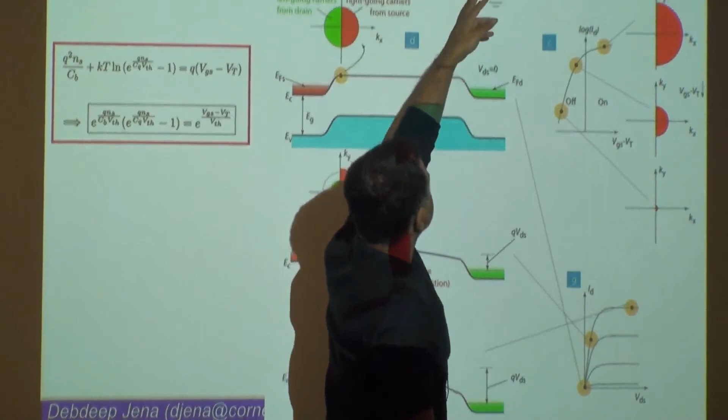So then it becomes harder because there's a coupling between the gate and the source and the gate and the drain, and they start interfering with each other's jobs. The drain will apply a voltage, but it will start pulling this down because it's also coupling to the gate, and that is called drain-induced barrier lowering, DIBL.

So how will it manifest itself? The current, instead of saturating, will kind of not saturate. It will have an output conductance—that's the word, output conductance.

And that's terrible for a transistor, because one of the very useful things is you always operate it in this saturation regime. If you have one transistor and you want to drive 4 other transistors with it, they're going to have different loads. Some of these may be on, some may be off, so the voltage may flip around a little bit as it operates, going zeros, ones. And you want the current to be completely independent of what is loading it. So this saturation is very, very important. In fact, the gain is directly related to the saturation, an amplifier, all these things.

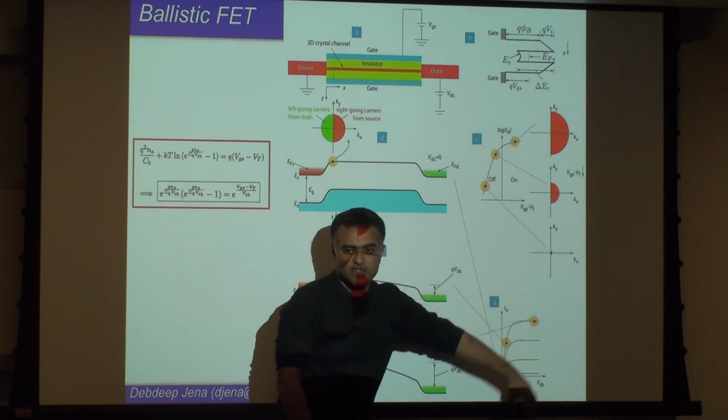So if the current doesn't saturate, if you just see a claim saying 'I have a transistor' and they're just showing this linear region changing, that's really not the regime of a transistor which is useful. I mean, it definitely has field effect—with field effect you can do this—but unless it saturates, it doesn't have much value as an electronic device for many situations with RF or digital and all that sort of thing.

Okay, so yeah. What does the Fermi energy look like in the P-type material?

You said in a P-type material? Yeah, so in the center of the transistor, how is the Fermi energy?

Oh, I see. So in this particular situation, the way it's drawn here, I have the Fermi level constant everywhere in equilibrium, so it just goes through that, and it's still kind of n-type because the Fermi level is closer to the conduction band, but there's much less electrons here.

In the case where we apply... yeah, okay, so when we apply, you can see, let me just say this Fermi level. Because it's a non-equilibrium situation, there's current flowing and all that, there's not just one Fermi level, there are multiple.

So there is a source Fermi level, there's a drain Fermi level, and there's one—I'm not saying there's a separate one, but you can define it—both of them are affected by the gate, right? So they're all kind of connected. You can calculate what is the net source Fermi level or whatever.

So you can calculate these things, and the current can also be related to that as well. So typically the picture is it splits inside, and that split is what carries the current, because if you had the same Fermi level everywhere, there's no reason for current to flow because it's already in equilibrium, right? So there's a bending and a split.

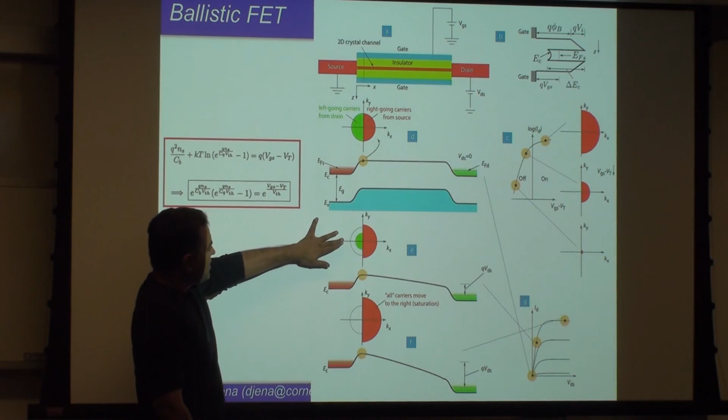If you apply the things we have talked about earlier, like if I want to calculate my electron density, two-dimensional electron density, all you need to really do is sum over all these states, the occupation function over all these states. And then if you couple it to the gate, you can find out how this occupation, the total sheet density, depends on the gate voltage, and here's the relation.

I will spend some time on Tuesday to talk about this, but I just want to say that this is completely written up in this set of notes, in this chapter. So it's completely derived, and from what we have done till now, if you read through it, all of this should make sense—you just use these things, sum over your Fermi functions, integrate it, and you get all these results.

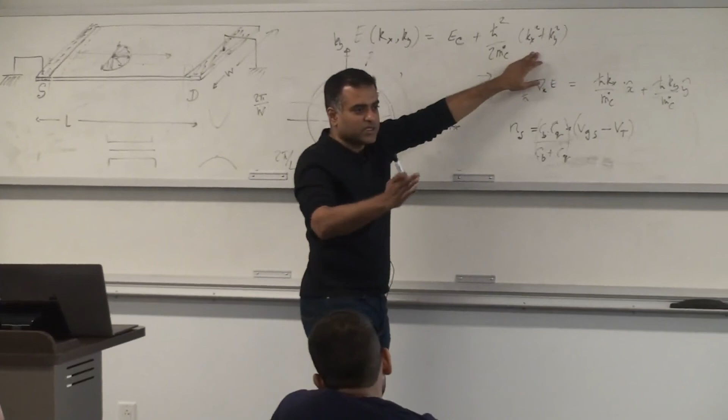And the most important thing about this is really that the device, when it starts operating, has this exponential switching characteristic. So I'll just kind of look at that. The carrier density controlled by the gate voltage is exponential, and so when the Fermi level goes into the gap, the carrier density goes down exponentially. When it comes into the band, then it kind of bends over. So this is very high carrier density.

10 to the power 13 per centimeter square is the on state. This is the off state. And if you go to lower temperatures, this basically has a slope of kT by Q, exponential with temperature. And in linear scale, this is how it looks—it looks like it was off and then it turned on here. In log scale, it looks like that.

And the net current—so the carrier density is the sum of the two halves, right? And the current is the difference of the two. Does it make sense? Because that's the right-going current, this the left-going current. So when you sum them, you find the total carrier density by taking the sum of these two, and the current will be the difference of the two. Right? And that's all to it.

It may take some work to make plots of them, but the formulas and all we can go over next time. I've also outlined in the notes how exactly to go about it.

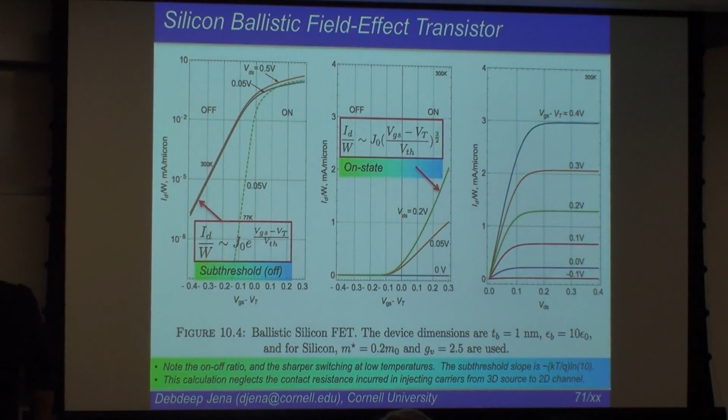Okay, so I'll kind of stop here with the slides showing that with this formula, with this sort of picture, you can calculate the transistor characteristic of any material, and all the material properties just do is tell you what's the effective mass, what's the valley degeneracy, and really that's it. There's nothing else other than that—it's a universal phenomenon is what I'm trying to say. Any semiconductor you give me, I can find out the characteristics: all I need to know is the effective mass and the valley degeneracy, and if you're making a gate, what's the dielectric constant of that material, capacitive coupling, right? And then you can find out.